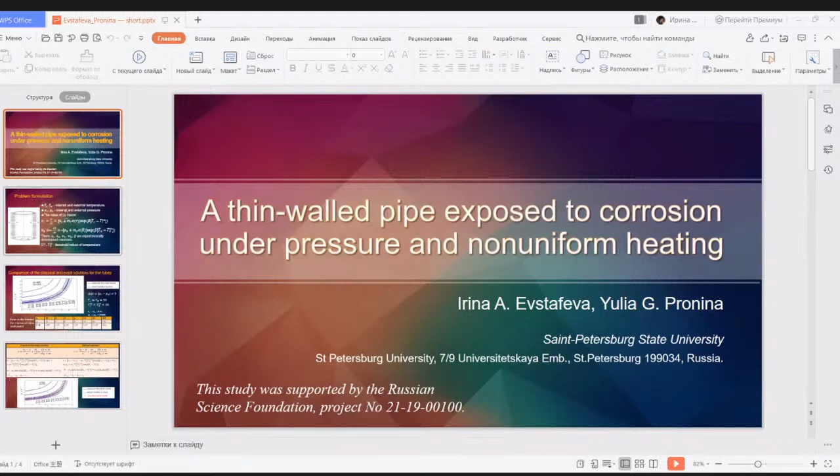We consider a linearly elastic thin-walled pipe exposed to mechanochemical corrosion and internal and external pressures, subjected to different temperatures. As shown in our paper, using the classical thin shell model for problems of mechanochemical corrosion can lead to significant error, especially when the common part of the internal and external pressures is large enough.

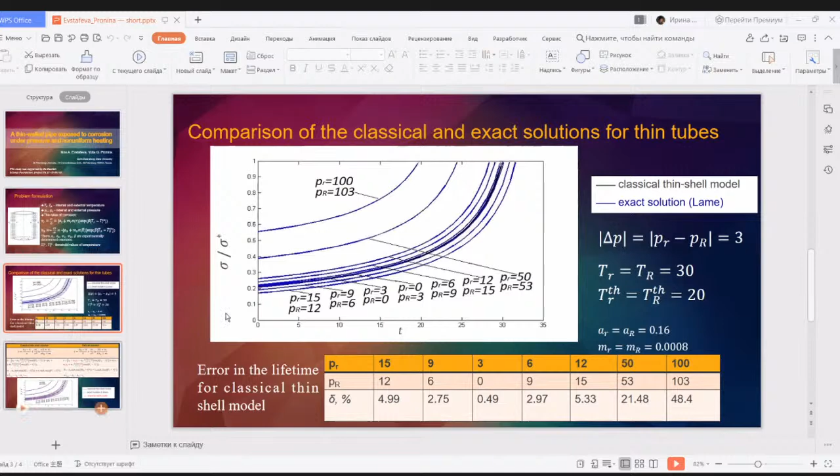We received a new solution in a form which is absolutely the same as the existing solution based on the classical thin shell model, with only the constants being different. At the same time, our new solution reflects the effects of hydrostatic pressure, change in the hoop stress through the pipe wall thickness, and of the temperatures, and demonstrates a perfect coincidence of results with the exact solution, which is rather cumbersome. So that's all what I wanted to say.

Okay, about our results. Thank you for your short presentation. Are there some questions from the participants? I'll try to understand if there is a question.

Okay, I have some question for you, Irina. The first is, have you calibrated your analytic solution with some experimental testing, or do you think you can calibrate in the future? So now we didn't calibrate our analytical solution with experimental results, but further we will try to do it, maybe.

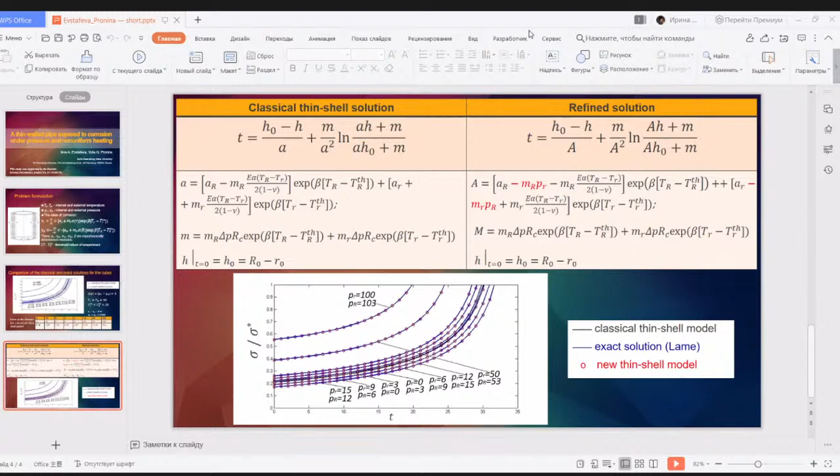Okay, thank you very much for your talk. Thank you, Irina. Thank you, Professor Pronina. If there is any other question from our speakers? No. Okay, thank you very much. I hope to see you in a better situation, live. Okay, we have the second presentation.

The title is 'Analysis of the Durability of a Functional Coating Against Glass Stress Corrosion' by Mariggio, Dalle Vacche, Bongiovanni, Corrado from Polito. Please. I leave my chair. Thank you. Hi everyone, really thanks to the chairman for the nice presentation. I'm Gregorio Mariggio, and I'm going to talk about the performance of innovative functional coatings against stress corrosion.

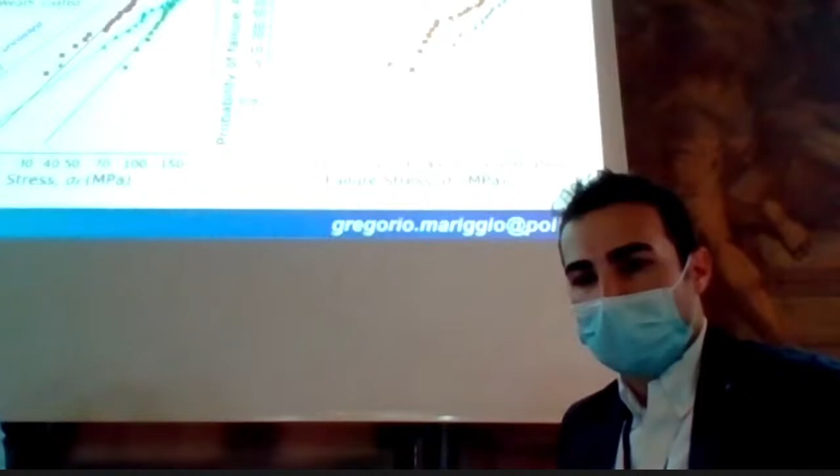Yeah, why not? In the future, we want to perform analytical analysis to better understand the behavior of the coating that was applied on the glass.

And do you think it's possible to do a numerical model, because it's not easy when there is this type of solution. But if you do, it can take a lot of time that you could use for other things.

Unfortunately, this numerical analysis wasn't done in this study. But in the future, maybe we'll perform numerical analysis. I think it is not an easy matter.

I agree with you. I think we don't stop now. Yeah, no. We want to perform other aging processes and also numerical analysis. Thank you.

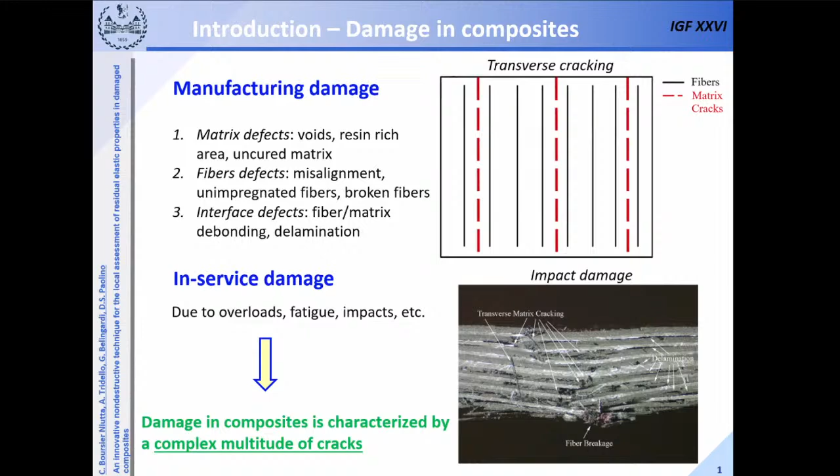Damage in composites is characterized by a complex multitude of cracks, which can arise from both the manufacturing process or during the service life. And also the prediction of the evolution is difficult and case dependent.

These observations suggest the need of assessing the damage severity in terms of material response in presence of damage or flaws, rather than in terms of extension of the cracked area, as usually done in current non-destructive techniques. The degradation of the elastic properties is the macroscopic result of the damage. So we aim at developing a non-destructive technique able to assess the residual elastic properties in damaged composites.

The method intends to isolate a region of the component by clamping the boundaries. In this way, a specific mode can be excited, as you can see here in the figure. From the measurement of the first resonant frequency, the elastic properties of the retained region can be assessed.

The technique is also characterized by a mapping procedure, where the device is moved on the plate in order to obtain different measures of the frequency. This also highlights that the frequency reduction was proportional to the participation of the damage to the mode shape. The higher the modal participation of the damage, the higher the reduction of the frequency. From this observation, we were able to calculate the elastic properties specifically of the damaged region.

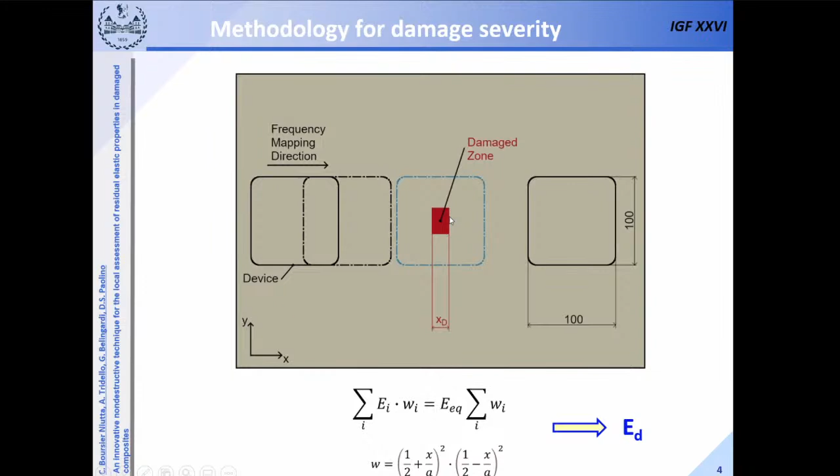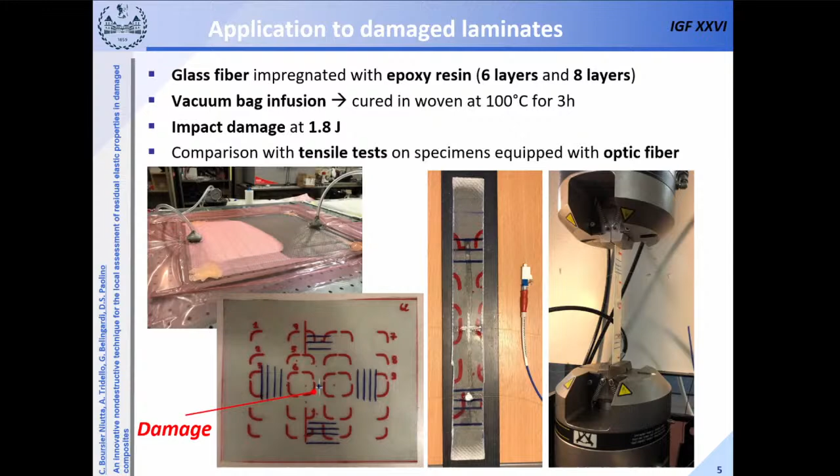To validate the technique, we consider two composites, one made of 6 layers and the other one with 8 layers, made of glass fiber and epoxy resin, that we realized in our laboratories in Politecnico di Torino, and that we damaged by impact. Then we applied the non-destructive technique, and then, to validate it by comparison, we performed tensile tests on specimens that we cut from the plate and equipped with optic fiber in order to obtain a punctual measure of the strains.

The same conclusion can be drawn also for the 8-layer plate, where again the reduction of the frequency is proportional to the participation of the damage to the mode shape. Again the reduction of the elastic properties is consistent, and again the discrepancy is very, very limited, which validates the technique. That's it from my side.

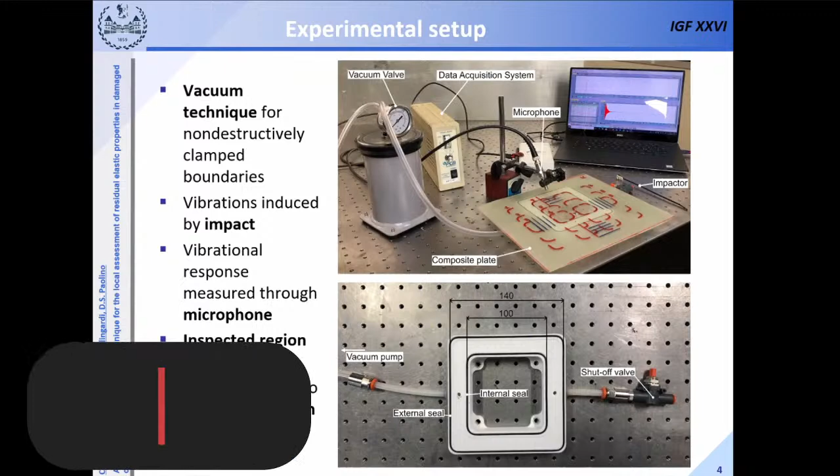In your opinion, is it possible to apply this technique to other materials? Because your materials are specific materials. Yep, but I think so. Yes, you can, but I don't know because it works for yours. I would say that if you're thinking about metals, then maybe there is not that much interest in applying that, because in the case of metals it's more important to know the extension of the crack rather than the residual elastic properties. For talking about other composites, well, it is part of the future work. In this case, we consider one simple composite because it was a woven fabric. Maybe we can switch to laminates made of unidirectional plies or also short fibers in the future.

Is this work in collaboration with some industries, or is it only research? Yep, research activity. Okay, very interesting, but I think that some industries would be interested in your work.

Okay, and it's not a question, it's just advice for other researchers that want to reply to your testing. What is the most difficult thing to do to reply to your experimental testing? What do you mean, sorry? For example, I don't know if it's the measurement system, or if it's difficult to have the specimen. What is the most difficult tool that you have during your experimental testing?

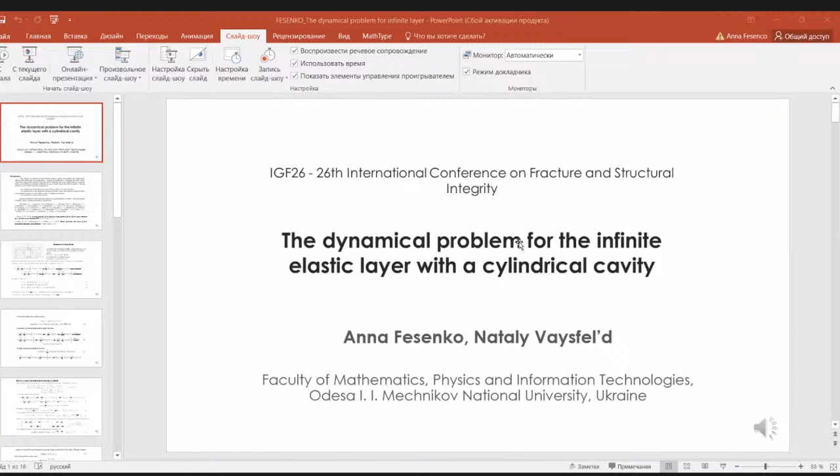Here in our work, we solved the problem with a cylindrical cavity. It can be considered also as a tube, for example. This method was proposed and developed by our prominent scientific leader, Popov Gennady, and it is about application of the method of integral transforms to the initial problems. After that, we can get a vector boundary value problem, and then it can be solved using matrix differential calculus.

We consider this statement a dynamical statement, so on the surface of the cavity acts a dynamical force. Both layer sides can be either rigidly fixed, or can be supported as a foundation without friction. When the condition of smooth contact is given on both layer sides, an exact solution can be obtained. When the sides are fixed, this problem was reduced to a singular integral equation, so this solution was approximate.

The uniqueness of this method is that all calculations and all unknown functions were matrix-based. So we applied a method developed by Popov, and constructed all given functions, such as Green's functions and basis function matrices, using this matrix calculation.

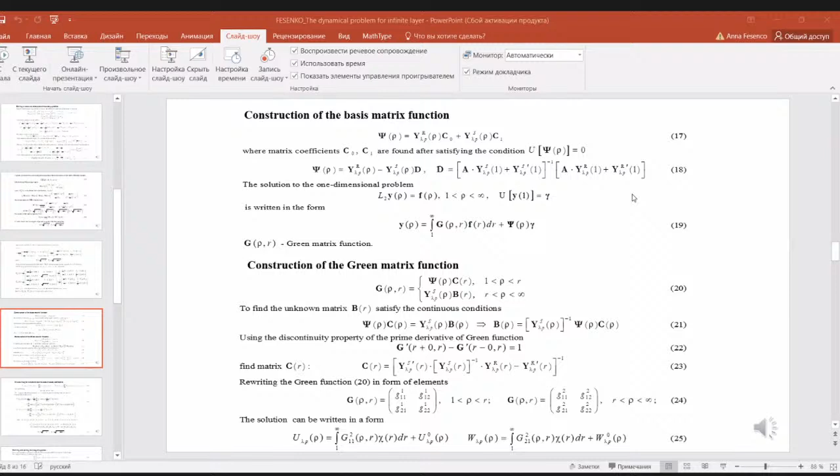After obtaining this solution, we were interested in calculating the stress that appears near the cavity surface on the fixed side of the layer. We considered different types of acting loads on the cavity surface, such as parabola branches down or up, and loads distributed according to a sinus law, like in these pictures.

We considered different types of frequencies. For large frequencies, we had to construct asymptotic formulas because of the presence of imaginary parts under square roots. We had to construct asymptotic formulas for different cases, for natural frequencies.

In brief, I think that's all. Okay, conclusion. I'm finished. Thank you for your presentation. I saw your long presentation on YouTube before this session. Are there some questions from our speakers, from our online friends?

I'm also interested, in the previous report in the previous section, when you made an experiment, and I thought it could be considered, for example, such as an inclusion that goes into the tube, but in this case we must also consider the influence of temperature. Maybe an inclusion that has some temperature, and what stress can appear near the zone of this inclusion in the layer. We would also like to consider the case when we have layers connected on one side—that would be interesting too.

Okay, thank you very much. In your opinion, what is the limit of your proposed approach? Where can you not use it?

In our work, we deal with pure mathematics. We have no opportunity to make an experiment. We try to find exact formulas, and we have complicated expressions under integrals, and the calculation is difficult because of the presence of cylindrical functions, Hankel functions, and after that we turn it into Macdonald functions and Infeld functions. We wanted to have a mathematical formula that represents this situation.

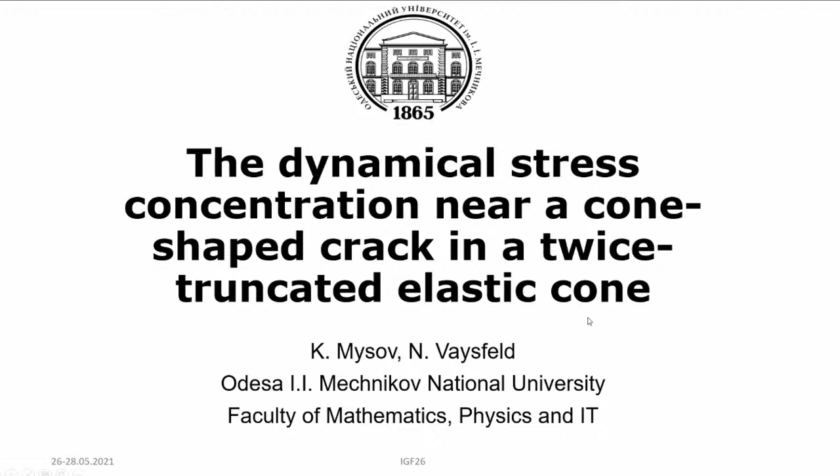My work is about the dynamic stress concentration near a cone-shaped crack in a truncated elastic cone. It was done in collaboration with my scientific advisor, Natalia Vaysfeld. In short, in my work, research was done for a twice truncated cone with a conical crack inside it, in a state of steady-state torsional oscillations. The solution is constructed as a superposition of continuous and discontinuous solutions.

Also, the solution was derived with the help of integral transforms and by solving integral equations with the method of orthogonal polynomials. Here you can see some of the results. The wave field of the cone was found, and for example, here is the stress intensity factor at the bottom edge of the crack.

Here we move the crack, same size, in the middle of angular coordinate theta from the bottom spherical face of the cone to the middle, and we see that when it's close to the spherical face, the stress intensity factor is higher. Here is the same for when we move the crack to the lateral surface of the cone. We can see that it is higher when we approach the border.

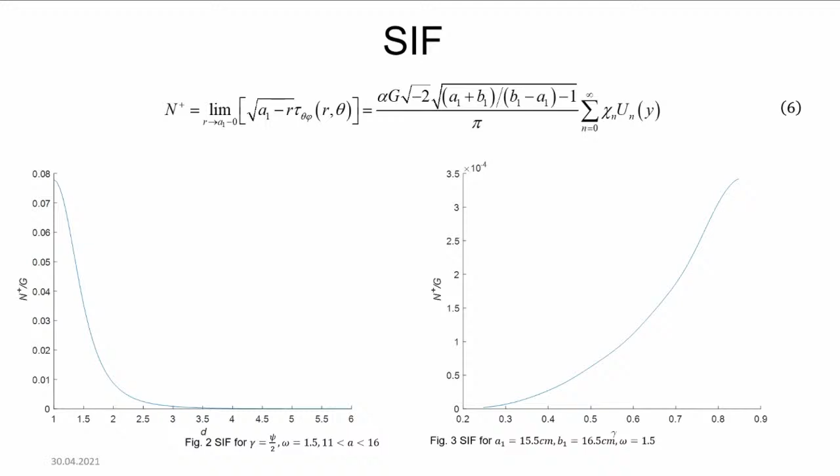So we can also see that the overall values of the stress factor are higher when we cross the border on which we apply the stress. So that's it in short. Thank you for your attention. Any questions? Thank you.

I saw your long presentation before. I don't know if there is some question from our speakers or friends. No? Okay, I have a question similar to Anna's, because your work is different but with a similar approach. My first question: do you think it is easy to use your approach to solve a problem with different boundary initial conditions?

And what is the limit? The limit, well, I mean there are also cases, for example, where the cone is limited. Could you repeat, please? I didn't hear. Okay.

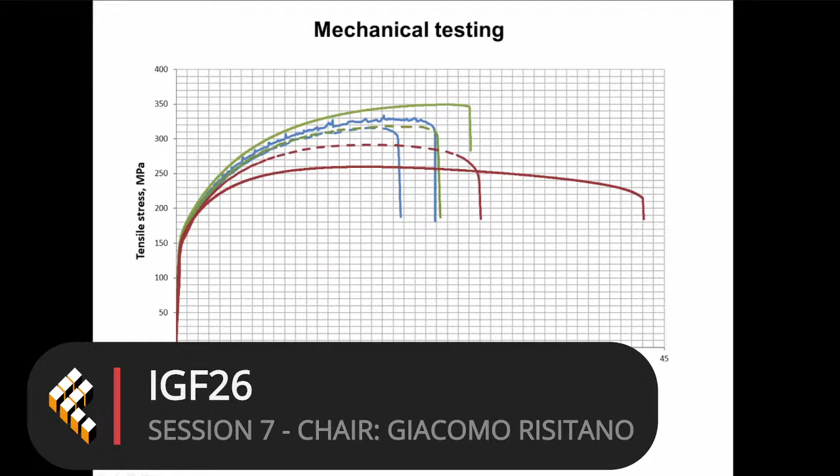We tested them during high-speed collision, trying to obtain the ballistic limit for this material also. As you can see, we made 6 groups of experiments for different loading speeds, which were near quasi-static loading with slight differences, and for 3 different temperatures: ambient temperature of 25 Celsius, 75, and 150 Celsius.

So we obtained the stress and strain diagrams, and we evaluated the values of the maximum loads and the stresses and strains at maximum loads for different types of loading speed and loading conditions.

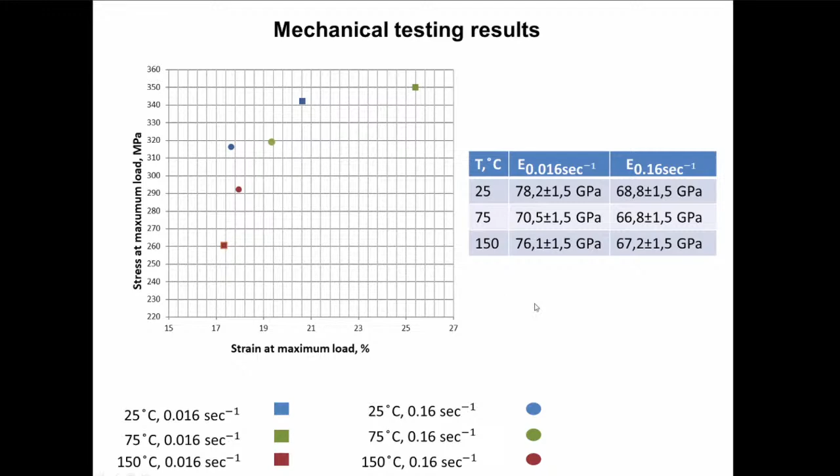As you can see, in comparison with ambient conditions, when we raise the temperature up to 75 Celsius, our maximum stresses and strains slightly increase, and then when we go to 150 Celsius, they decrease to some degree. At the second part of the study, we performed ballistic loading with our test rig.

This rig allows us to obtain the kinematic characteristics of the specimen, of the projectile, for different types of projectiles, and also allows us to obtain the dynamic stress, strain, and displacement fields using the DIC method, digital image correlation method.

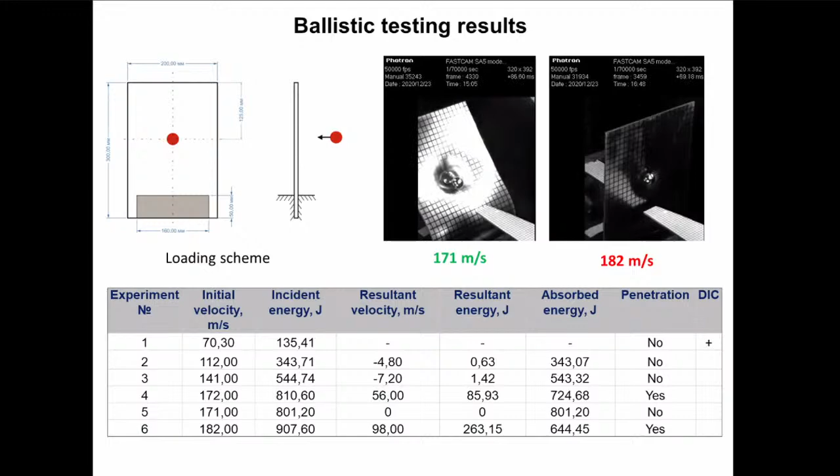As you can see, the obtained ballistic limit was somewhere around 171 meters per second, and we hope that someone can use this data to fine-tune or start to tune their mathematical models of the collision process of a rigid spherical projectile with this alloy.

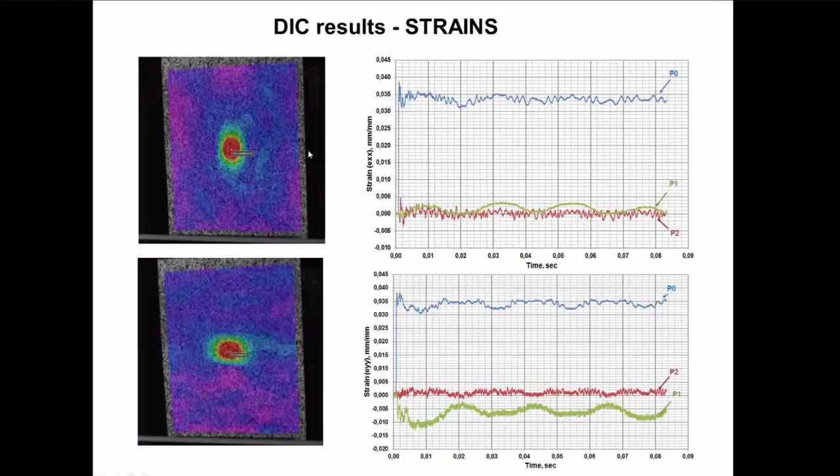We also obtained time-displacement dependencies for different points: the point of collision, the point on the top of the specimen near the clamping, and also the time dependencies of strains in the YY and XX directions. So this is my short presentation, I hope you have some questions. Thank you. Thank you, Nikolai.

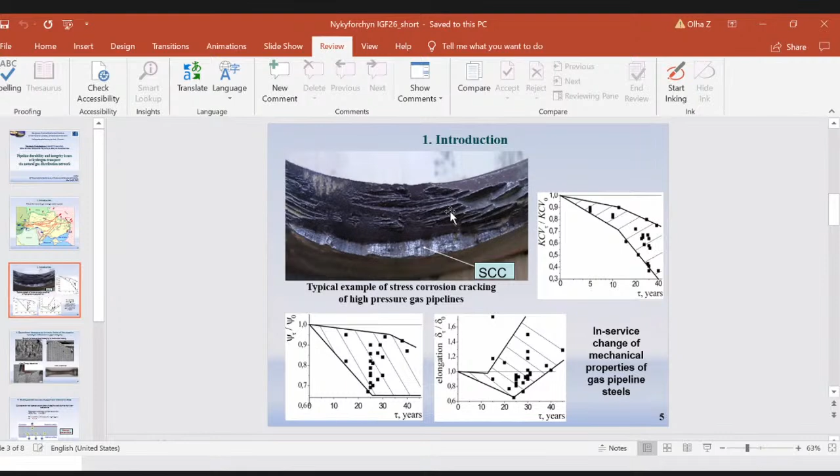Yes, this is a very dangerous phenomenon for pipeline stability. So, dissipated damaging during long-term operation is the main factor for loss of mechanical properties, especially brittle fracture resistance properties. Here you can see the most striking examples of operational damaging in pipe steels, which increases the risk of structural integrity violation.

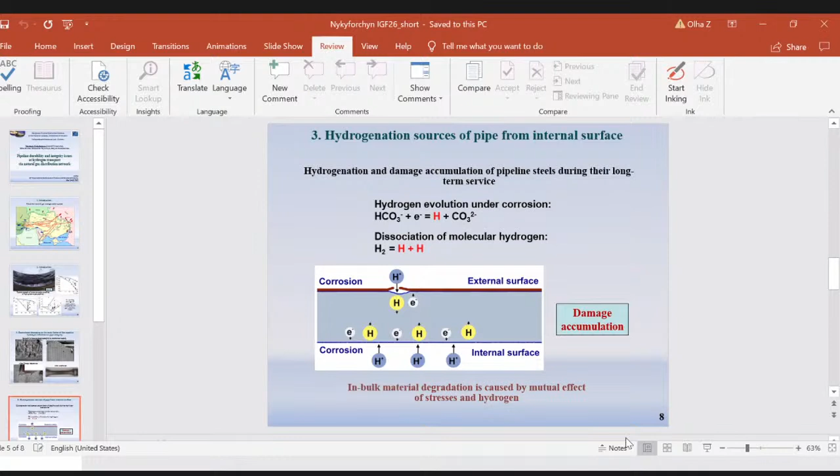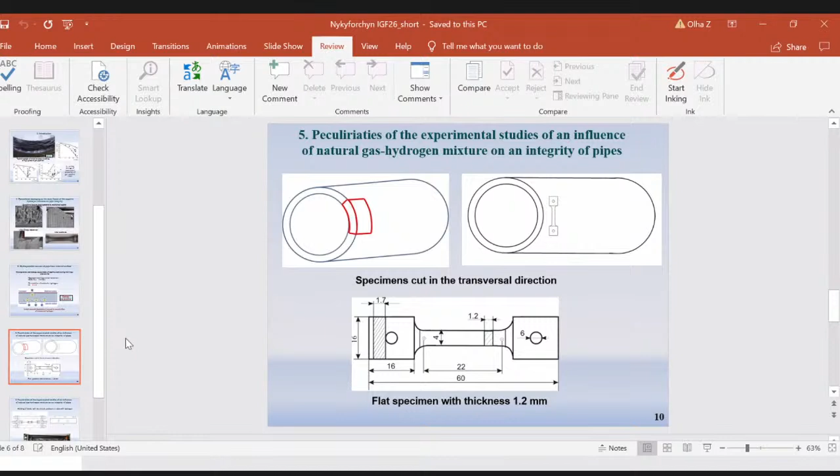We expect that during this long time, the material will be hydrogenated and also possibly degraded due to the joint effect of stresses and hydrogen, during such long holding of specimens in field conditions. The main point in these experiments is that we should avoid hydrogen desorption when we take specimens away from the pipe to test in laboratory conditions. It is very important because we should prevent hydrogen desorption, so we should test specimens after holding in the pipe with the hydrogen concentration that was present during long-term holding in the hydrogen atmosphere. Thank you for your attention.

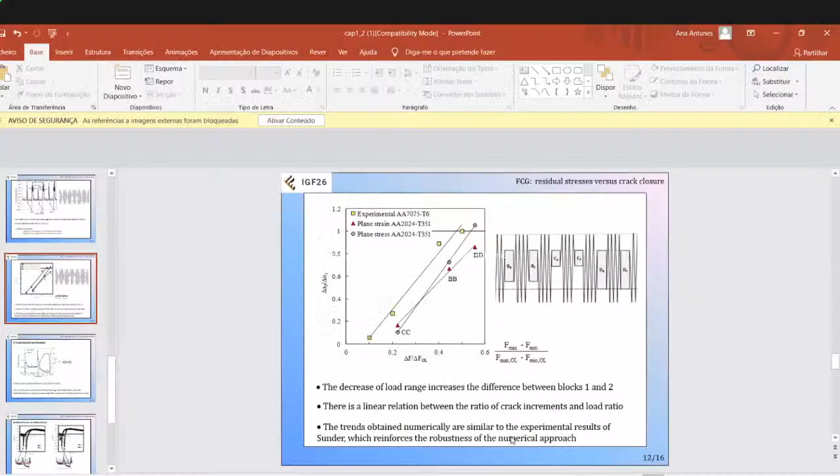You can see? Yeah, I see. Okay, so let's do my presentation.

So the title is Fatigue Crack Growth, Residual Stresses versus Crack Closure. There is a great debate about the relative importance of residual stresses and crack closure.

In this study, we consider the so-called Superblock 2020, which is composed of 8 load blocks separated by overloads. Note that there is a difference between the first and second block of the same type, because in the first case there is an increase of the load, and in the second case there is a decrease of the load from the maximum value of the overload.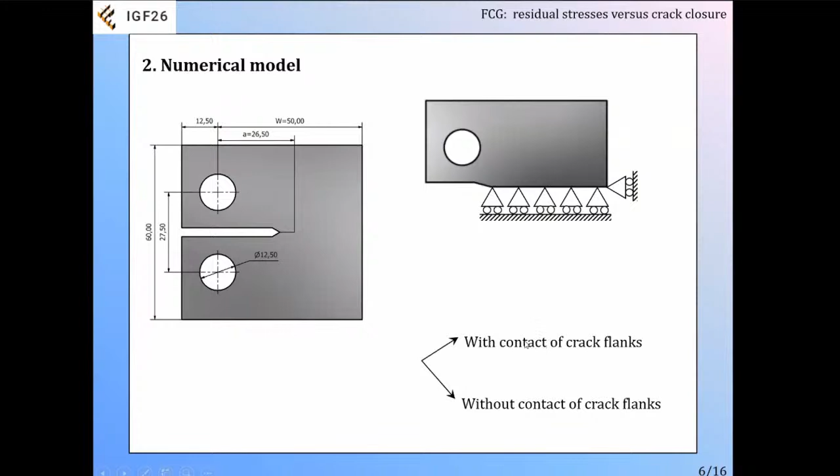And now we try to replicate this study numerically. You can see here the geometry of the CT specimen, which we studied with and without contact of crack flanks.

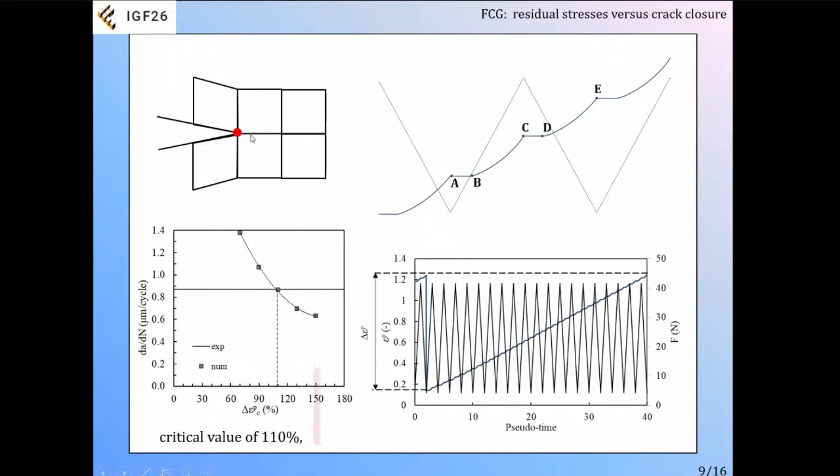We considered the finite element mesh, as you can see, and we replicated the load patterns and material properties as much as possible. In order to predict fatigue crack growth rate, we analyzed the cumulative plastic strain at the crack tip. When this accumulation of plastic strain reaches a critical value, the node is released and there is crack propagation. The critical value is calibrated using one experimental value of the da/dN.

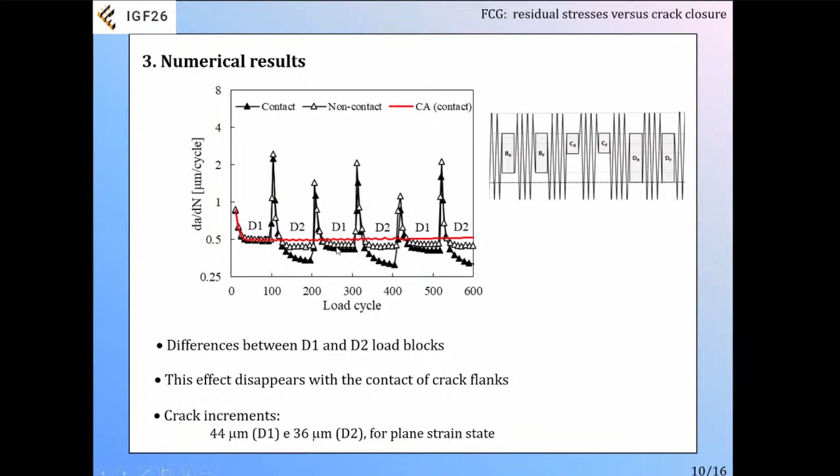When you remove the contact of crack flanks, which means removing the crack closure phenomena, the difference disappears, meaning that now you have the same fatigue crack growth rate in both cases. Similar results were obtained for other load blocks.

Here we compare the numerical prediction with the experimental results. The experimental results were obtained for another material. Anyway, there is a good agreement between both approaches, numerical and experimental. Note that here, when you decrease the load range, there is an increase of the difference between the two load blocks.

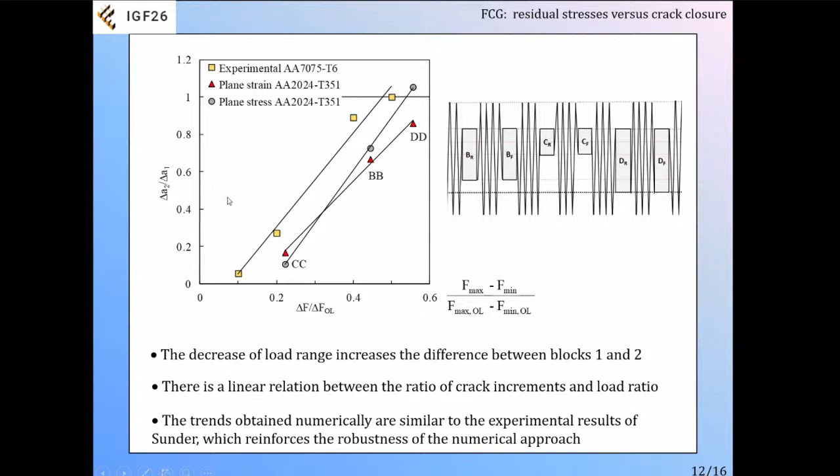When we analyze the crack closure level, we saw that there is an excellent agreement between the variations of crack closure and the trends of the da/dN. In the first block, there is no crack closure, and therefore the da/dN is nearly constant. In the second block, there is a decrease of the da/dN, which is explained by the increase of crack closure level.

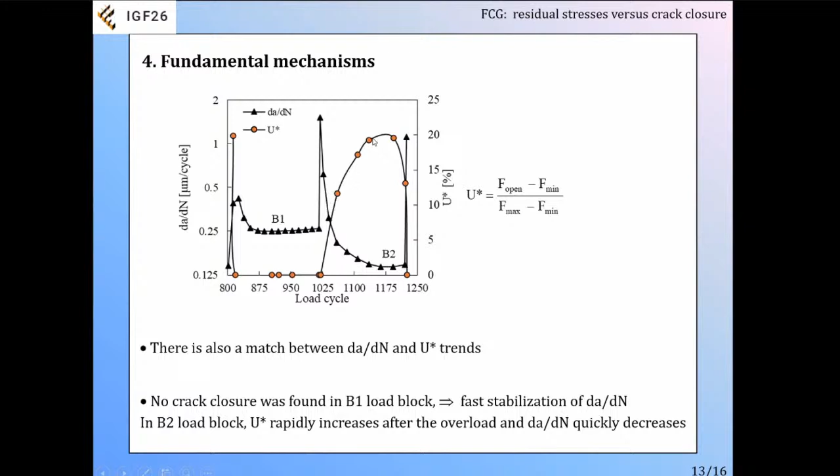So the conclusion is that the residual stresses cannot explain the trends, and crack closure is the main phenomenon responsible for the trends we observed numerically and also experimentally. Okay, and that's all.

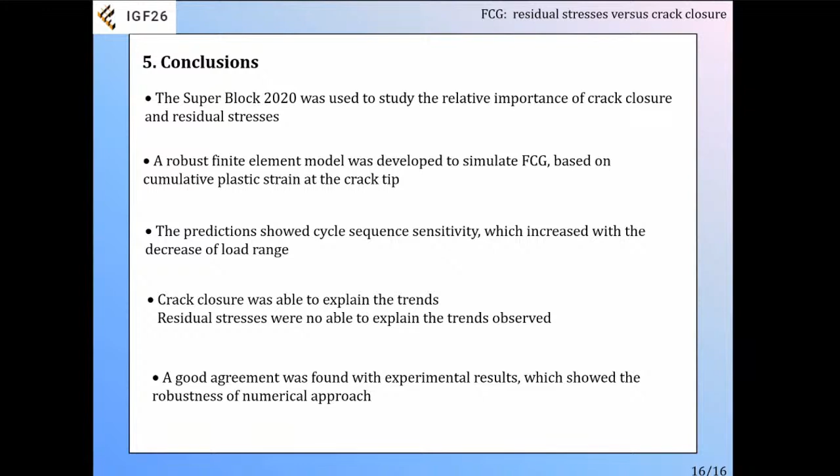Thank you very much. I appreciate very much your work, and I saw your long presentation. Are there some questions from the speakers, from other persons, from our visitors? No? Okay.

I have some questions for you. I don't understand what software did you use for the FEM model?

Okay, we have home-developed software which is called DD3IMP. Initially, it was developed to study deep drawing. But since it is very good in the modeling of crack tip plastic deformation, we adapted it to the study of crack tip damage, assuming that fatigue crack growth is linked to cyclic plastic deformation at the crack tip. Thank you, thank you for your answer.

Okay, during your complete presentation, during slide 12, you say that there is a linear relation between the ratio of the crack increments and the load ratio. In your opinion, why?

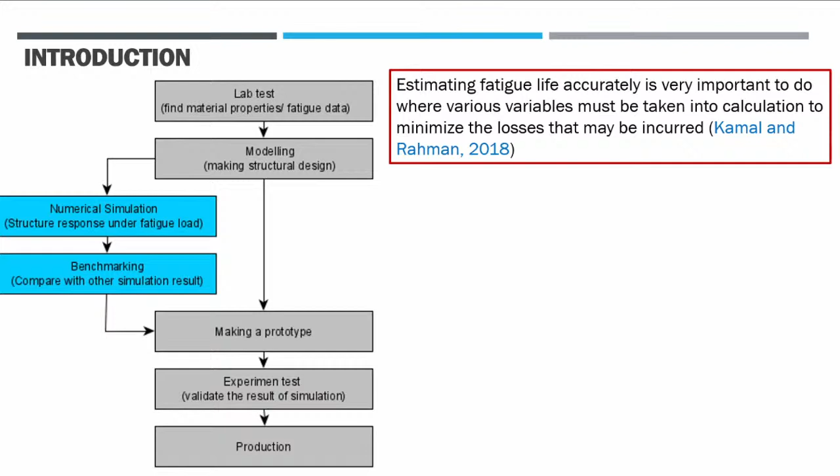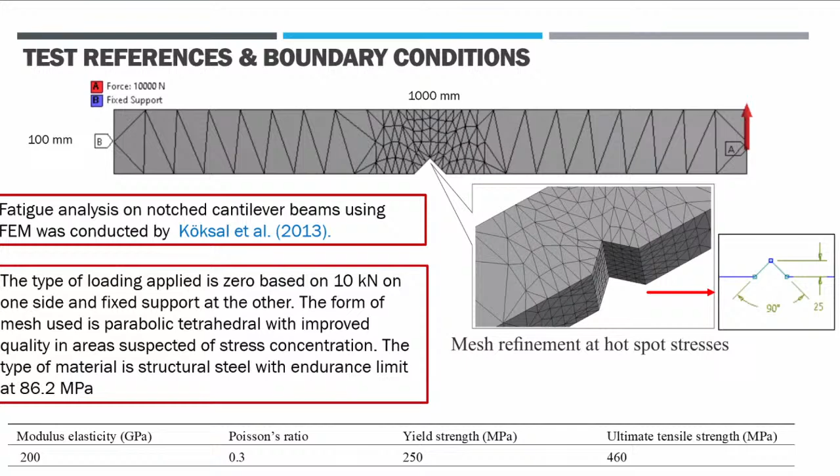In the recent research, the stress component used is von Mises stress, and because the loading scenario is not zero mean, several mean stress theories are needed to correct the stress amplitude. Based on the convergence analysis, the mesh used in this study is 4 millimeter. The benchmarking result has a small error, so this procedure is valid and can be used for the following research.

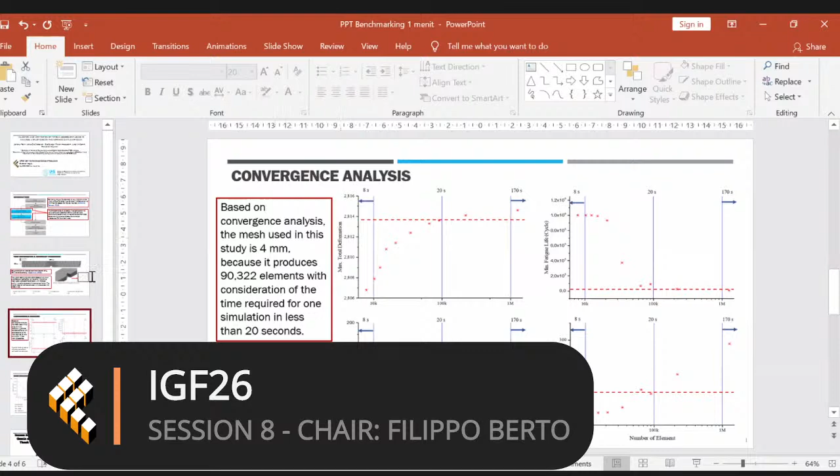So there are no questions, so I will ask some. The first one is: have you evaluated the mesh sensitivity for applying your criterion, because I think that is a bit important for this case? Have you considered different mesh sizes, or did you always fix the same size? I use different mesh sizes, sir. The consideration for the mesh size I choose is the time required for one simulation and the resulting value, sir. Okay. And I use mesh refinement on the hotspot stress, like this.

Okay. And about the shape of the notch that you selected - did you study only one sharp notch, or is your intention also to extend the approach to blunt notches?

I use the form of parabolic tetrahedral with improved quality in areas suspected of stress concentration, sir. Only one form. Okay.

You say here that your study is dedicated to fatigue, right? Yes, sir. So why did you use the von Mises stress? I mean, usually von Mises is mainly used for static failures, but is there any specific reason for selecting von Mises instead of any other stress?

Yes, sir. Based on the literature review that I have done, the von Mises stress can be used for this condition, sir, and has the value that is best for this condition, like this.

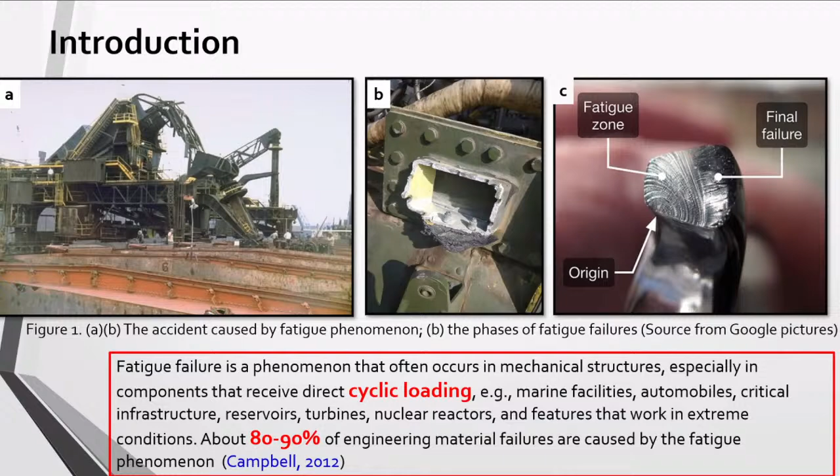Fatigue failure is a phenomenon that often occurs in mechanical structures, especially in components that receive direct cyclic load, for example marine facilities, automobiles, critical infrastructures, reservoirs, turbines, nuclear reactors, and features that work in extreme conditions. The fatigue phenomena causes about 80 to 90% of engineering material failures. Several factors can affect fatigue resistance and must be considered when designing a structure.

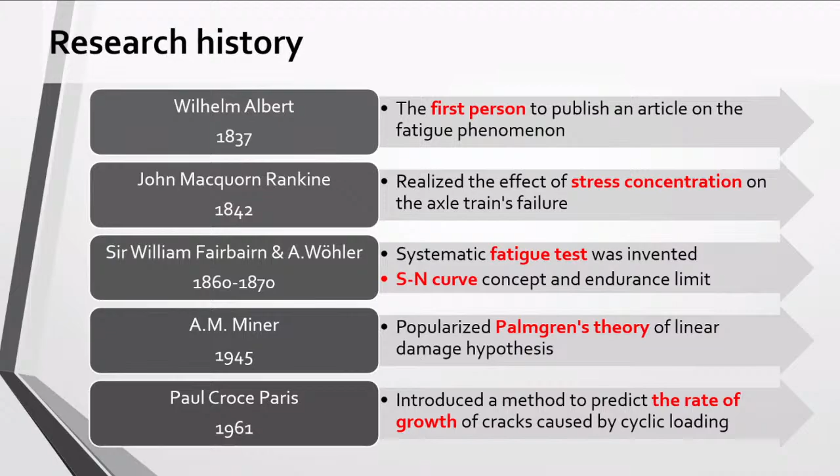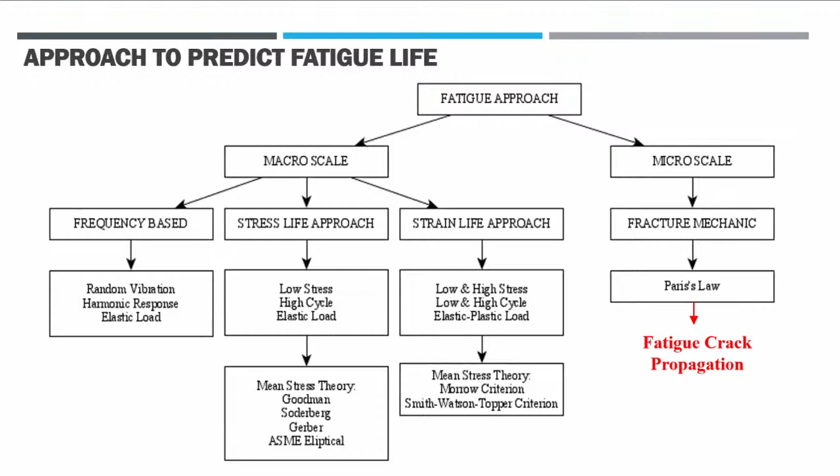Research on fatigue started more than a century ago. Until 1961, a new method known as fatigue crack growth was discovered by Paris. Currently, several approaches can be used to analyze fatigue in structures. This approach can be divided into two types based on the basic assumption, the presence or the absence of an initial crack. Thank you.

Okay, thank you so much. Is there any question to the speaker? You're welcome to make questions. So if there are no questions from the audience, I can make some.

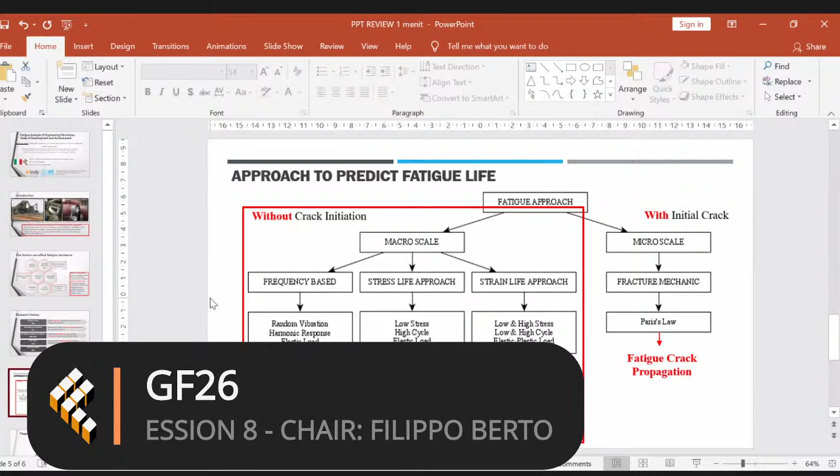So you have shown that there are criteria that work well with the crack, and criteria that work well for a component without a crack. So I would like to know your opinion about the criteria that you consider more promising with the crack, according to your experience, and which is the trend in this direction for the future - a kind of future perspective for some useful criteria that we should consider in presence of cracks.

Okay, thank you, sir. There are several factors to determine the approach that must be used. If the condition is no crack initiation, we can use a frequency-based stress life approach or strain life approach.

The criteria is: when the condition is low stress and high cycle, and the area is elastic load, we can use the stress life approach. Several mean stress theories can be used: Goodman, Söderberg, Gerber, and ASME elliptical. Goodman and Söderberg are best suitable for ductile material, and Gerber or ASME is best for other material.

And then if the condition is low and high stress, but low and high cycle, elastic and plastic load, we can use the strain life approach. The mean stress theory we can use is Morrow criterion or Smith-Watson-Topper criterion. And then if the structure has an initial crack, we can use fracture mechanics to predict the fatigue crack propagation on the crack, like this, sir.

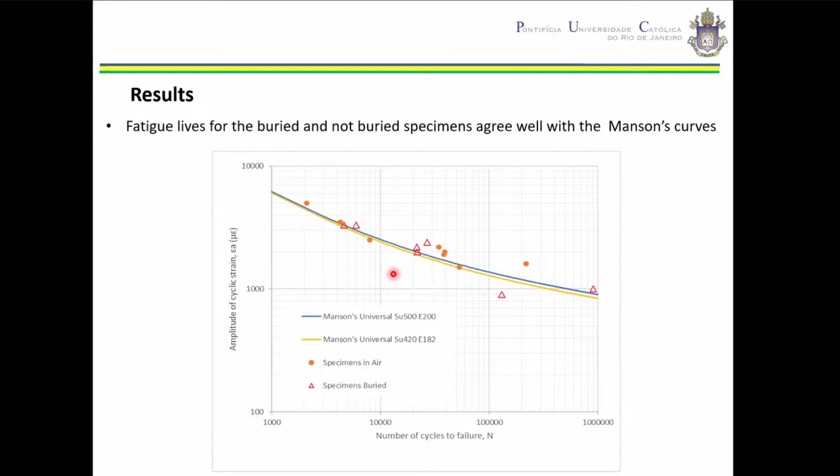So the conclusion of this paper is that we combined a set of two experimental techniques, digital image correlation and fiber optic strain gauge, and we were able to predict the life of the buried specimens with dents using a simple Coffin-Manson equation. Also, the soil did not influence the life of the specimens. I believe that's all.

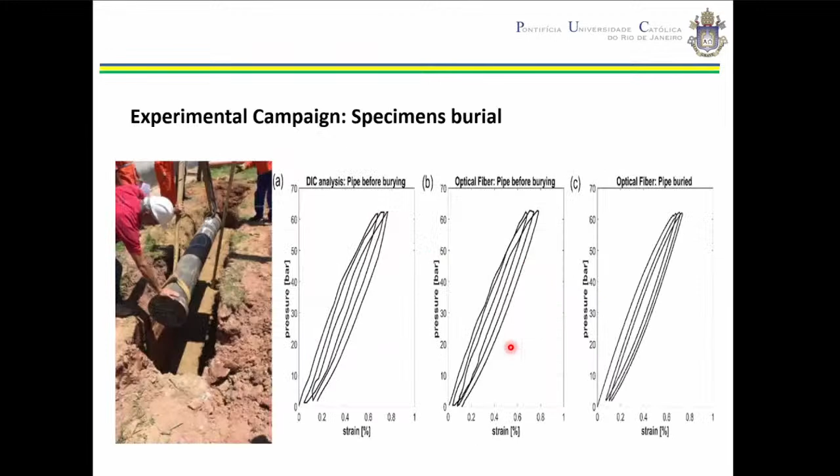I have seen that you used different monitoring approaches in parallel to monitor the structure of the pipe. Usually the setup of this is quite difficult, and I would like to know your experience with this, because from my experience, using DIC is not always very easy. I want to understand from your point of view if you had issues with the setup, or if everything was quite straightforward and easy.

This project we initiated in 2007, so we have had a lot to learn with the DIC combination with strain gauges, and we gained a lot of experience. In the beginning it was very difficult. The hardest part was to connect the specimen to the hydraulic machine. After that, we were able to control the pressure and measure with DIC, because we have a load cell so we can measure the pressure with the DIC output, and correlate the strains with the exact pressure.

After that, we were able to place the strain gauge and repeat that. You can see here that we also use a thermal camera, but not in this paper specifically. We didn't include these results, but in all the others tested here, we use the thermal camera to analyze the specimen's behavior during the fatigue tests. We were able to see the crack growth and how the specimen was behaving, because we use TSA - thermoelastic stress analysis - which lets you measure the first invariant of stress. So we were able to compare this: here's the DIC image with the infrared camera, and also the strain gauge results.

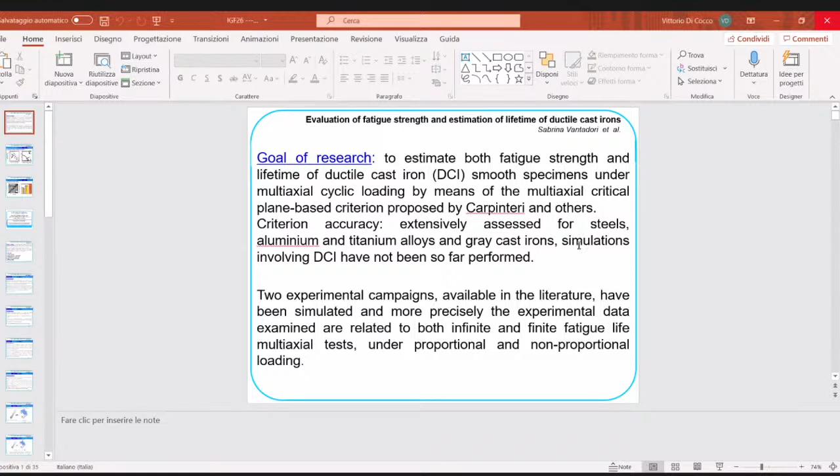It has been shown that with the multi-axial criterion employed, a quite satisfactory accuracy in the evaluation of fatigue endurance condition has been achieved. Moreover, for finite fatigue life tests, the number of loading cycles to failure has been estimated with satisfactory accuracy, far greater than that related to other multi-axial criteria available in the literature. Okay, thank you for your kind attention.

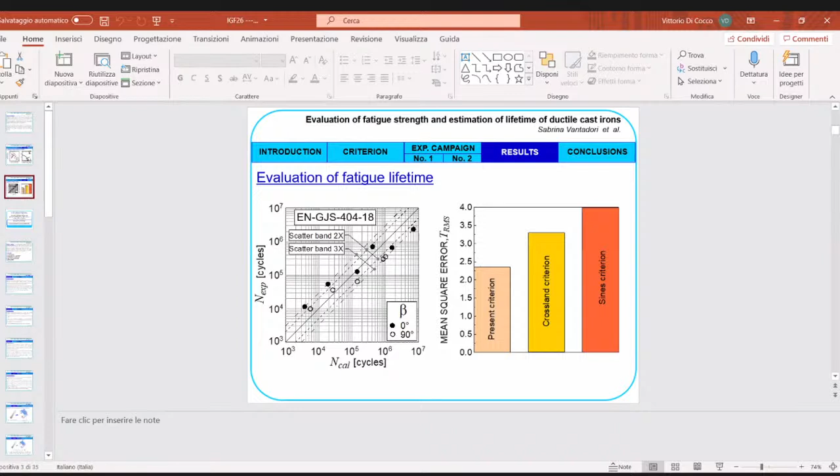Thank you for the presentation. I ask the audience if they have questions, please. No questions from the audience, so I will ask you some curiosity. The first one: I have seen here that you have applied the criterion to notched specimens and plain specimens. Is there any plan to make a more extensive work later on notched samples, and how you will approach this problem in that case?

Yes. The criterion was applied in the case of notched specimens and also fretted specimens, together with one of three methods. One of the three methods related to the critical distance, in particular the point method and the line method. The results obtained were quite satisfactory, both in the case of notched specimens and in the case of fretted specimens.

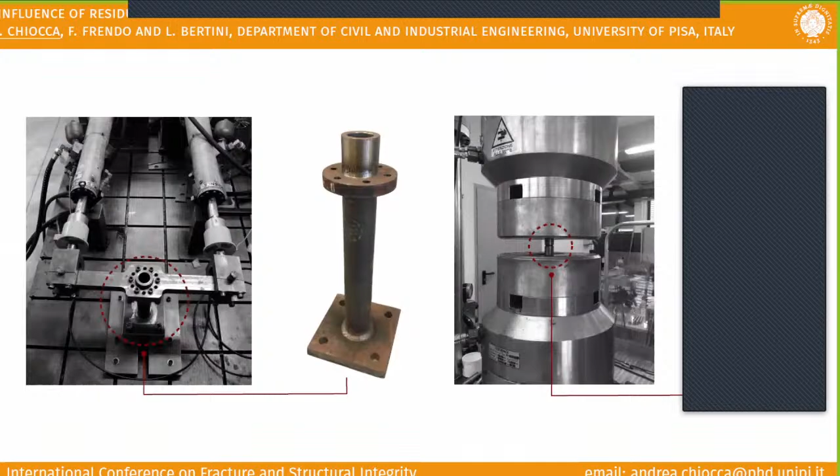First of all, we tried to understand what was the influence of residual stresses on the welded joint, both from an experimental and a numerical point of view. What we are doing now is trying to translate the results we had on the welded joint also for the notch specimens, so we can better control the residual stress field we create, and we are trying to reach the same results.

Dealing with the welded joint, we made some numerical studies. First of all, we did a numerical simulation, a thermo-structural numerical simulation, to be able to at least have an idea of the residual stresses. So we calculated residual stresses, and then we mapped these stresses for a fatigue analysis, also from a numerical point of view. We initialized residual stresses, and we calculated some fatigue damage factors.

Precisely in this case, we calculated some critical plane factors for the critical section, and for those interested, the critical point here was the weld roots. So all the critical plane factors here, both for bending and torsion, were evaluated at the weld roots.

So the main result here was a different behavior in pure bending and pure torsion. After relieving some specimens, we highlighted a different behavior. During pure torsion, the fatigue life was increased. At the moment we don't have so many results - the experimental part is still an ongoing project. On the contrary, for the bending part, we noticed no difference between the relieving process and the as-welded specimen.

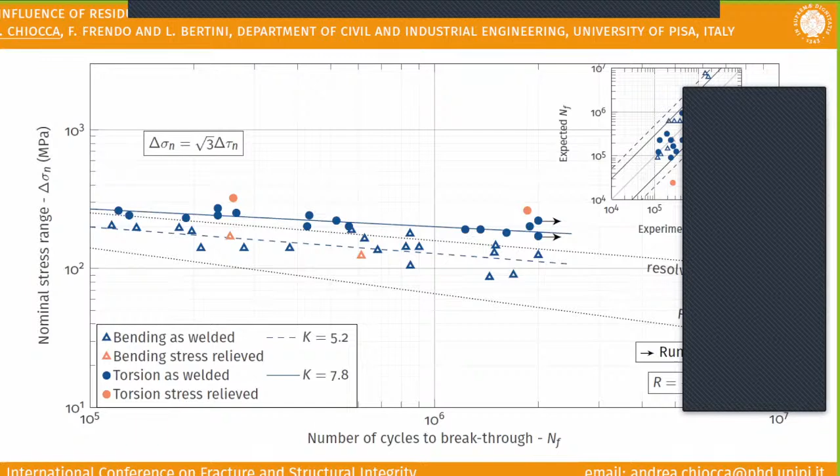Having the numerical model, so having the numerical residual stresses, we were able to evaluate from a numerical point of view if this difference existed also from a critical plane factor point of view, and we noticed the same thing. As you can see, I reported here the maximum relative error, which is around 8% for pure bending, and the maximum one is around 30% for pure torsion. For pure torsion, the error was always greater than 15%, while in the case of bending it depends on the load. We did this also for other critical plane factors, and we noticed the same behavior.

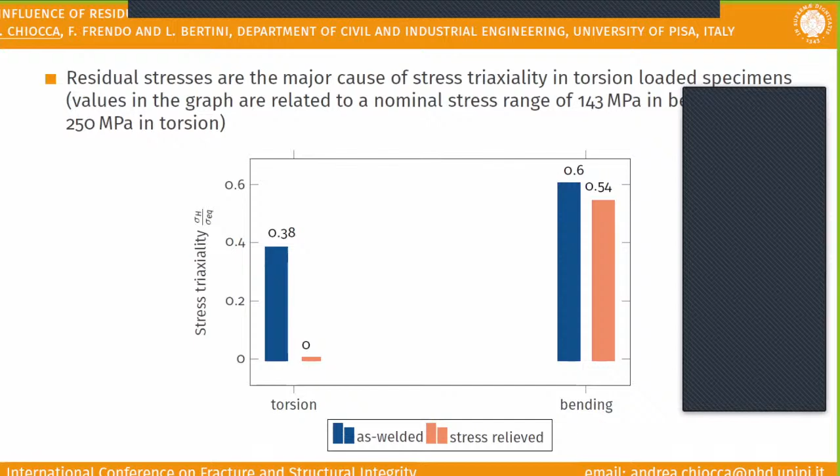So let's say that a factor that can describe this behavior at the moment is the stress triaxiality. We noticed that in the case of pure torsion, nominally the hydrostatic stress should be zero, and instead when you introduce residual stresses, this hydrostatic stress can change. So it can have an influence on the final fatigue life of the specimens, while in the case of pure bending, the stress triaxiality factor was nearly the same for both as-welded and stress-relieved conditions.

So what we are also trying to do now with this notch specimen is to control the residual stress inside the specimen. At the moment we are doing different tests, both by pre-compressing the specimens and then using fatigue loading, torsion and tensile, or using a constant tensile loading and then using the fatigue loading.

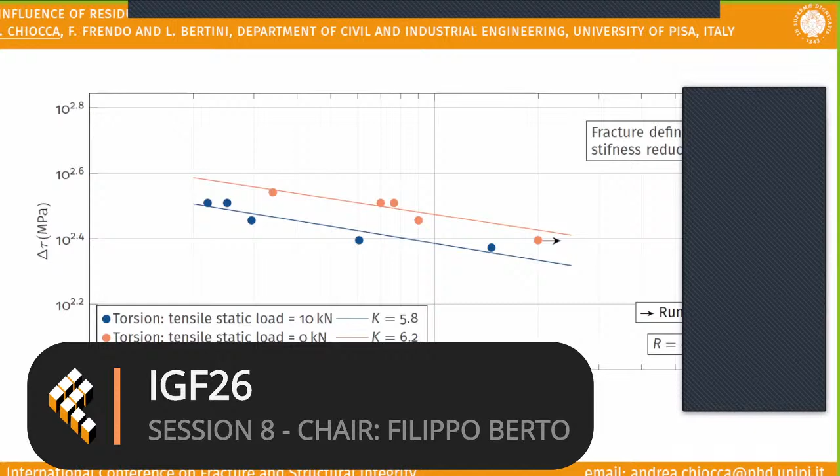In this case we are changing the load ratio. So I only have the results at the moment for pure torsion loading with a tensile static loading of 10 kilonewton. We could expect that the fatigue life is increasing if we are not loading the specimen. So what we are doing now is to compare all the results and try to understand if we can replicate what we saw with the welded joint.

Okay, I finish here. The notch specimen geometry was made to replicate in some ways the notch made from the weld seam. So the radius is the smallest possible we could design, and also the angle of the notch, so as to have the same plastic region compared to the welded joint.

So the main conclusions here are: there is an effect made by the load, whether it's pure torsion or pure bending, and whether in presence of residual stresses or not. So we are trying to understand what are the main parameters affecting this behavior, by using a simple specimen where we can control more, because usually with welding it's really difficult to have full control of what is happening in the region of the weld seam. So thank you everyone, and if you have questions please feel free to ask.

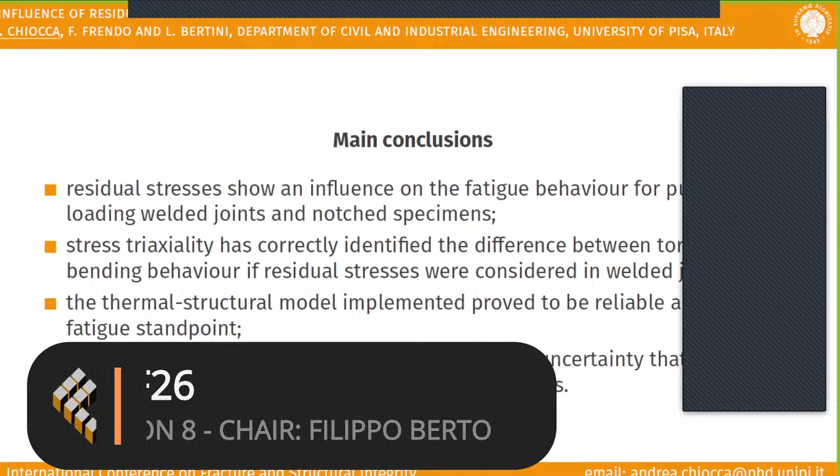I also agree with Paolo that your work is quite impressive. It's touching a very important topic. I have a question for you. I've seen that you made some experimental results under bending and under torsion. Did you detect during the test a different behavior in terms of plasticity under torsion and bending? And can that be correlated with the different slopes of the curve that you found in the fatigue results?

Let's say it was difficult first of all to detect the crack. In these kinds of specimens, we used a pressurized chamber to detect the through-the-thickness crack. For some specimens, we broke down the specimen to have a good visualization of the crack. One point was that sometimes the crack initiation point was changing from specimen to another, but I'd say 90% of the time it was starting always in the weld root. For torsion, 100%.

For bending, in some cases the crack was starting from the weld toe, the low weld toe. I think the crack initiation point, it's difficult to say why something like this is happening, but for sure it's correlated with the different geometry of each specimen from a weld seam point of view.

At the moment, we never focused too much on what was happening closely. We were testing the specimen. Once the pressure chamber was emptying itself, for us it was broken. So we never really focused too much on it from a crack point of view, because it's difficult with this kind of specimens.

This is a presentation on a quite simple topic. Between these advanced topics being presented in the conference, it's good sometimes to have fun with some very simple ideas. It's mainly toward design and correlating it to what we know from fatigue. So the typical thing we know from stress analysis, let's go for a simple case: if we have a plate which doesn't have any notch or geometrical discontinuities, the stress flow lines are usually parallel, and the distance or density between them is almost uniform.

So here, if you look at the stress distribution in the gray area, you can see that it's quite uniform. In the same plate, if we introduce a circular notch in the center, we can see that on the edges of the notch, the stress raises, which is quite normal. And obviously in that area, we have a higher density of the stress flows, and the lines are getting closer to each other. This eventually results in a factor we call the stress concentration factor, higher than 1.

So in this project, we were thinking about how to reduce the stress concentration in the component without changing the overall geometry of the part, or the geometry of the notch. We want the geometry of the notch to be constant and somehow manipulate the stress flows in the component to reduce the maximum stress ahead of the notch.

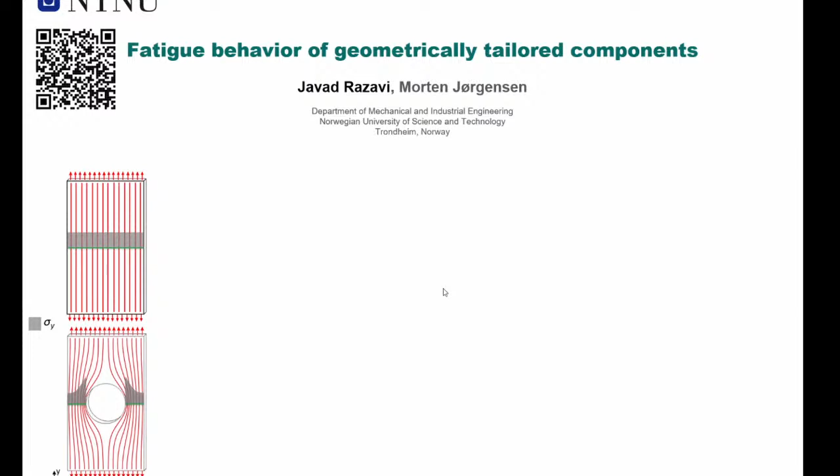We had other cases called notch 5 and notch 7. This number shows in total how many notches you have in the sample. So notch 5 means we have 1 main notch and 2 additional notches on each side of the center notch. In this case, we thought the added notch in the sample was quite large, 3 millimeters compared to 5 millimeters.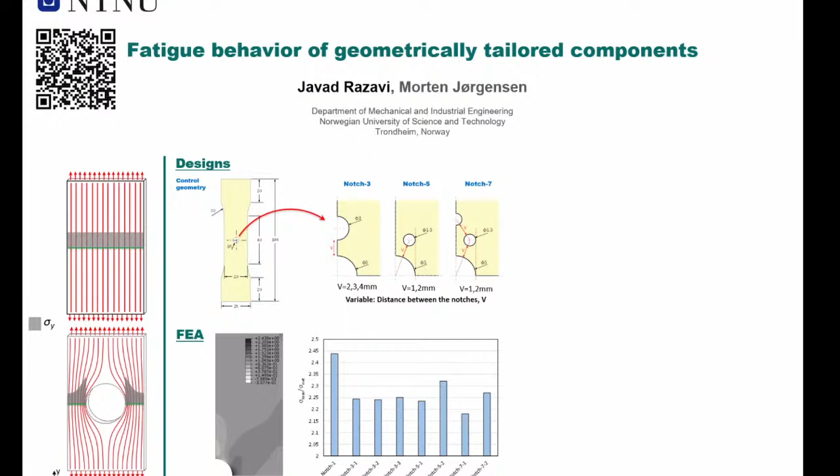But this was just the stress analysis, and we couldn't get any conclusion from it. So we performed some preliminary fatigue analysis on the samples fabricated using this geometry. The samples were made of aluminum alloy, machined to the geometries we had designed.

Here you can see the results of the fatigue test in all cases, including the control specimen. The applied load was kept constant at 4.5 kilonewton as the maximum stress, with a frequency of 20 hertz. In all cases, we had an increase of fatigue life from around 100,000 for the control specimen with only a circular notch, up to even 300,000 for at least one case in each batch.

So this doesn't quite follow what we saw in the linear elastic analysis that we performed, but overall, it was quite hopeful for us to see that even by adding a small notch that has a radius of 0.7 millimeter somewhere around the main notch, we could manage to increase the fatigue life 3 times.

Of course, this is not a general statement. This enhancement can depend on so many different variables, including the load level. Obviously, if we have a higher load level, we should expect lower enhancement of the fatigue life because of the possible plastic deformation that can be caused in the geometry and the sample. But overall, in the 2 load levels that we had, I'm presenting one of them now. In both cases, the enhancement of the fatigue life was quite significant.

Motivation: in order to predict the behavior of real structures, we have to know the elastic constants and strength parameters of a composite. We have to test it in various directions because laminates are highly anisotropic materials.

So how did we do it? We reach biaxial loading conditions because our specimens are highly anisotropic. Under compressive load, the specimen wants to change its shape, but due to friction force it keeps its initial state, and we have a combination of two forces: compressive and friction force.

We can also change layer orientation, so we can cut our specimen from a different direction and change this level of anisotropy.

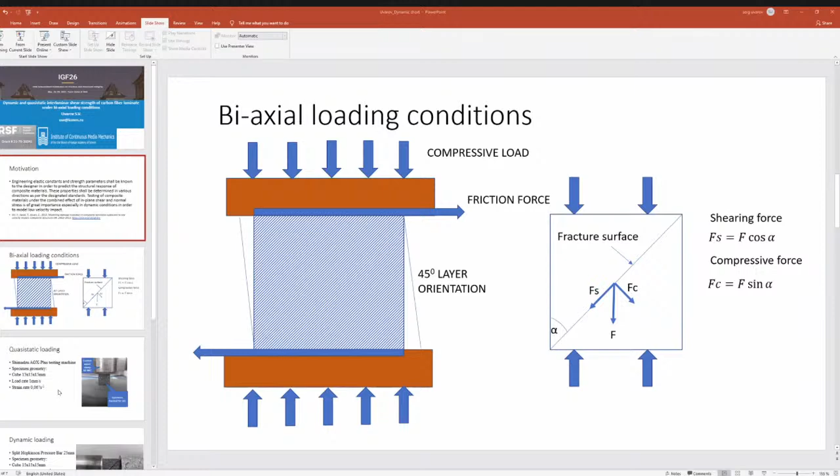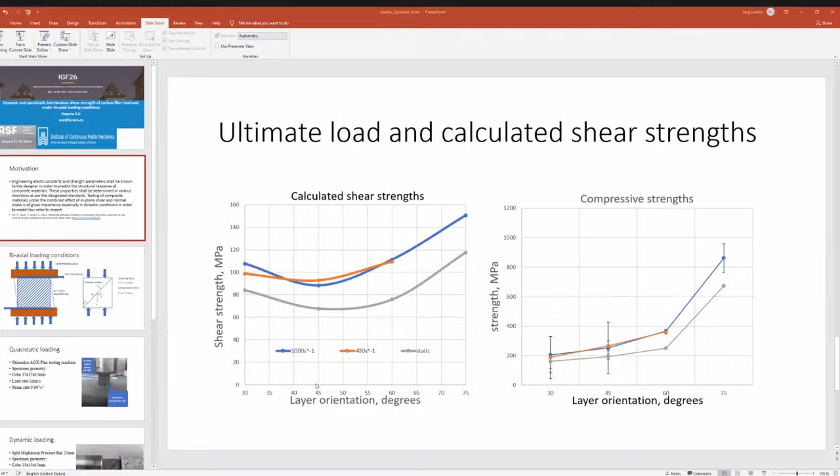We performed this test at different layer orientations and different strain rates, and found that shear strength is more or less independent of layer orientation, especially if you keep in mind the scatter of results. Shear strength varied maybe 2 times, but compressive strength of the specimen varied by almost 4 times. So we found that shear strength is much less dependent on the compressive force than, for example, the friction force under the same conditions.

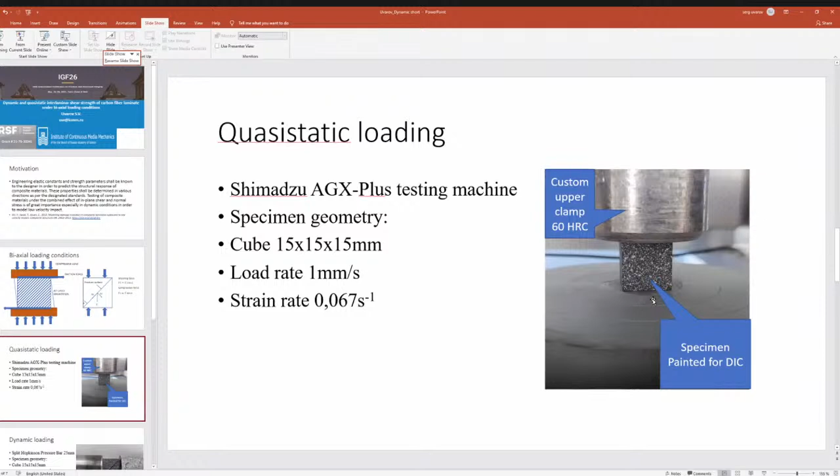Yes, yes. For example, we can do some kind of notch in order to reduce the area of the process. It is quite easy to change scale in quasi-static loading because here maybe we can test a 4 times larger specimen, but in dynamic tests we have a limitation. It is quite hard to increase the diameter of the Hopkinson pressure bar, because if we increase the diameter then we have to increase the length, but we are limited in area. In our case, the total length of our setup is around 8 meters.

So if we want to increase the scale of the specimen twice, we would also have to increase the length of our setup—maybe not twice, but something around that. Thank you so much.

So I think you are also an author of a second work that was in the previous section, am I right? Yes, but I don't think I have her presentation here. I think she decided to make her presentation tomorrow. Okay, my colleague, perfect. Yeah, it's perfect, yes.